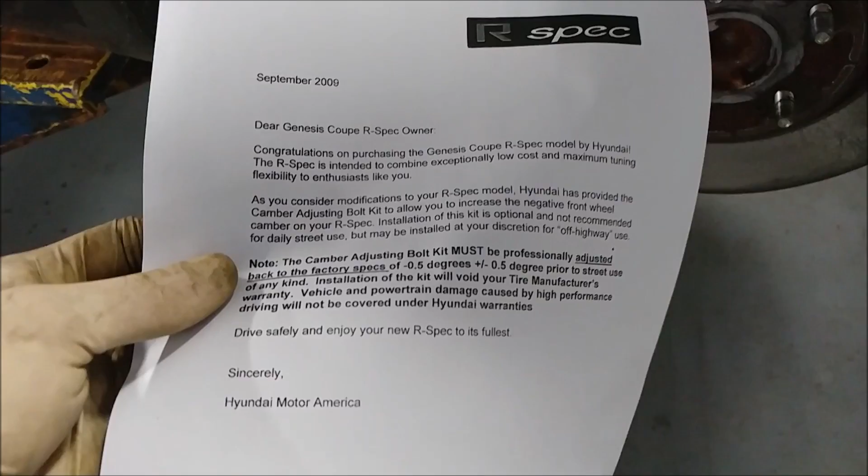As many of you know, I have a Genesis Coupe Ultimate Edition. This is really meant for the R-spec, although I don't know if it'll fit on here, but it's a camber kit. You can pause and read that. What it basically says is, if you go racing and you break something, don't blame us. But this is a camber bolt, it has a cam on it, if you can see. It's got a cam on it that allows you to adjust the camber of the front wheels. Let's do that today.

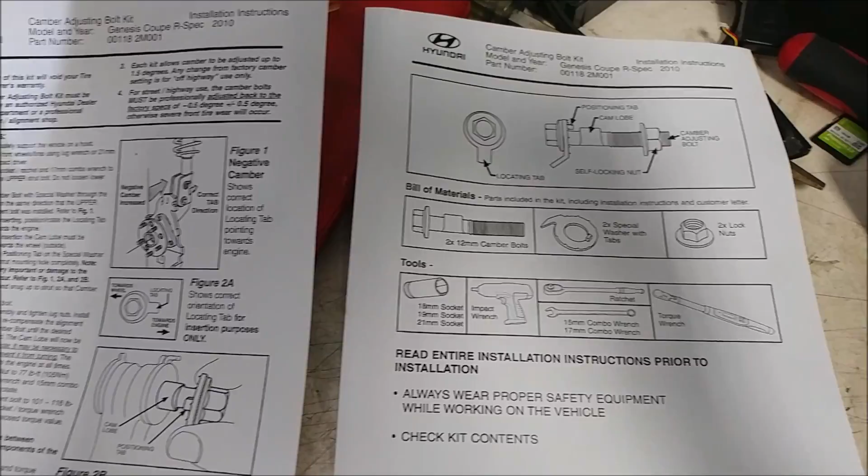Alright, instructions, parts. Can I do this without the wrench falling? Yes, I can. Alright, loosen this off camera. It's gonna fall, it's gonna make a noise. Loud noise warning incoming.

Face this tab towards the engine, because that's what it's telling you to do there. And then have the cam facing out. Come on, you were just there. There we go.

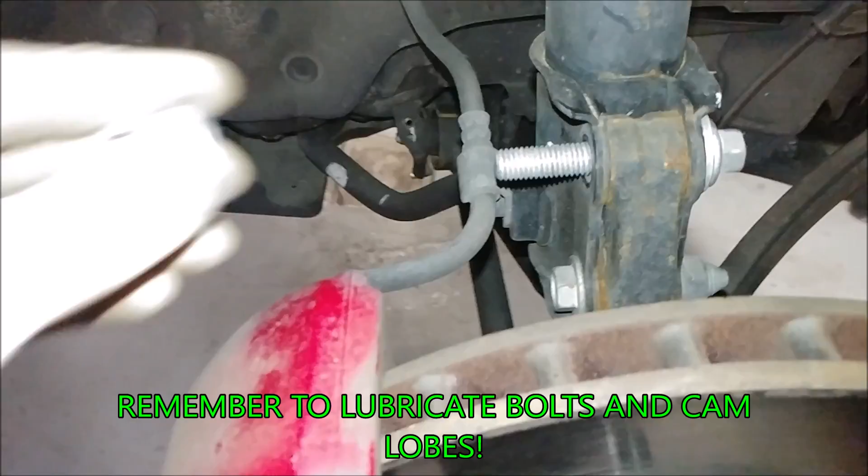And then, yeah, this is right. As I'm tightening this, you can actually see the wheel beginning to change angle. Is that gonna... okay, no, that's gonna go on the strut, that's fine. Oh, there it goes. It's really minuscule, but let's say in a track situation, that would mean quite a bit.

Yeah, this thing doesn't have any power.

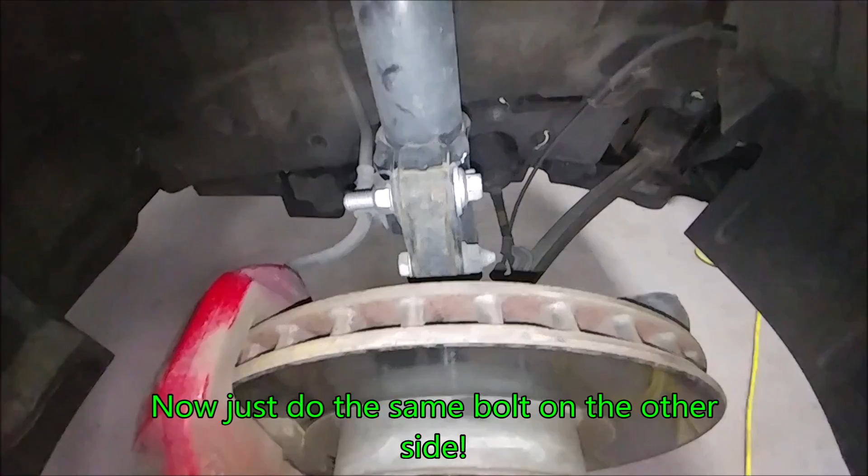Alrighty, well that's done for right now. I didn't tighten it all the way because I'm going straight onto the alignment rack. To do this, afterwards you'll need an alignment, because it throws the camber out of whack as you're tightening it.

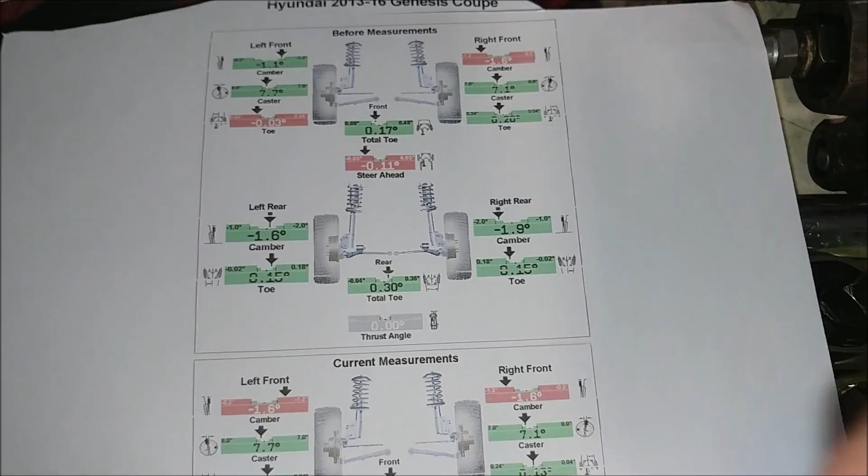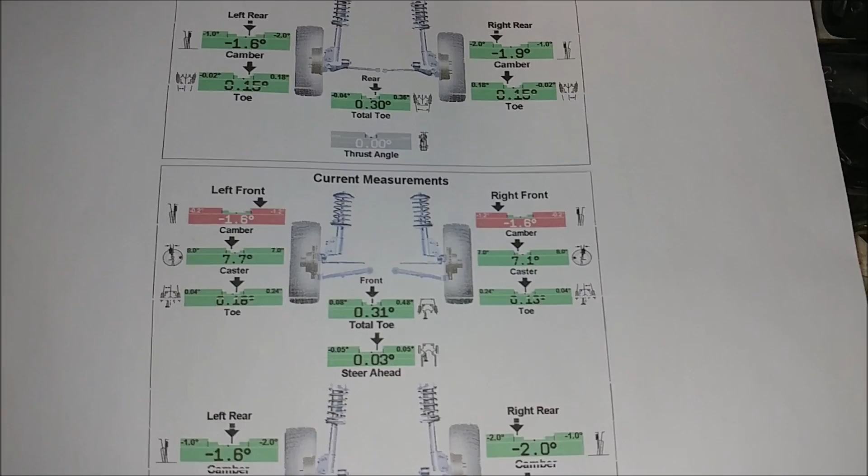Alright, and there we go. That was my before measurements. I definitely had some horrendous steer ahead, and one of the cambers was actually already out, and that's the new one. The camber bolts do adjust properly, they actually do work. I don't know if it works to its fullest potential like it would on an R-spec, but I have no reason to think that the suspensions are different. I think that they're the same.

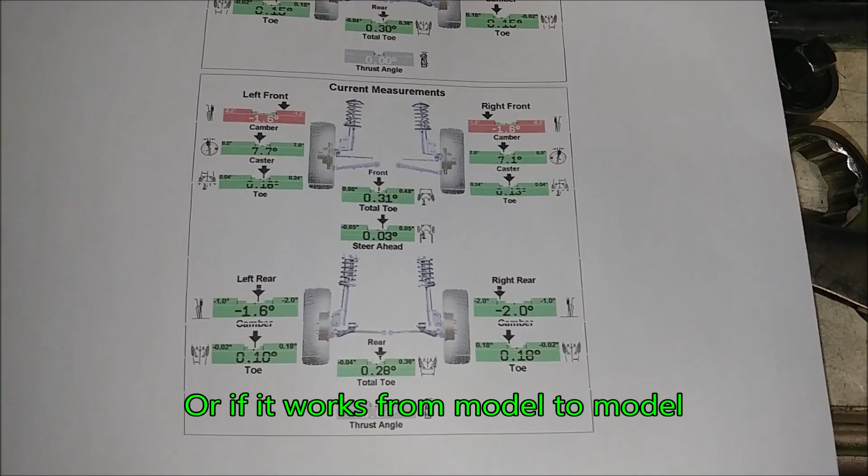Don't quote me on that though. Mind you, if you do put any kind of camber on a car, or excess camber, it will throw it off completely. It'll cause uneven wear on the tires and possibly drivability issues.